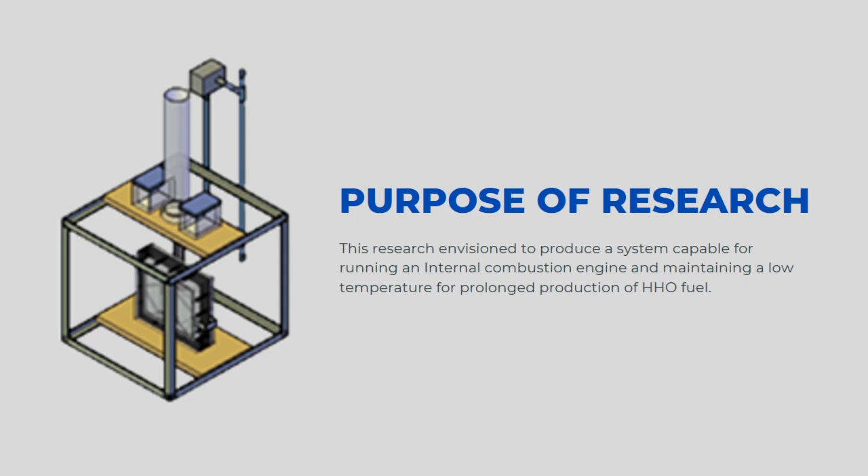On this project, we will be making use of cooling tubes and an acrylic glass frame, which will be further discussed on the following slides. There are three main objectives for this project.

First is to stabilize the temperature and to show the significant effect and difference upon the application of acrylic glass frame and cooling tube to the generator. Second is to stabilize the production of the HHO fuel, and lastly, to become automobile efficient.

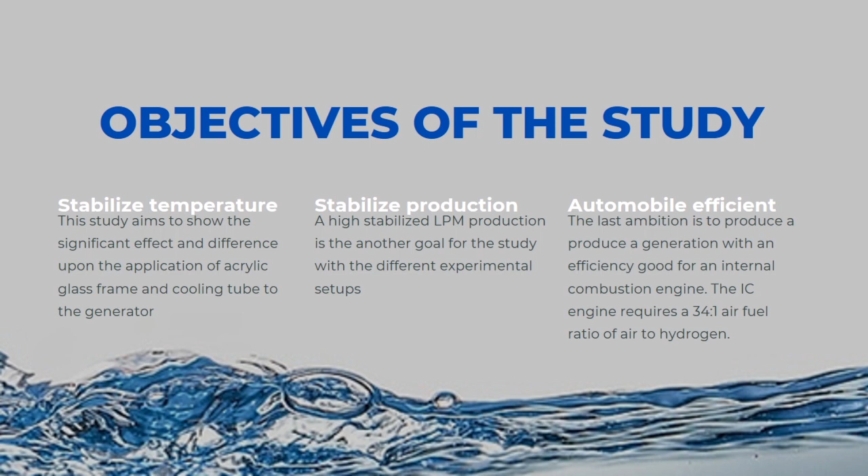This project has two targets. Number one is the automotive industry. Emergence and development of alternative fuel vehicles as well as systemized vehicle catalytic conversions have been regulated for future improvements.

Alternative fuels for automobile applications include natural gas, propane, hydrogen fuel cells, and even electricity. However, although promising results can be seen in the use of these alternative fuels, innovations are required before being commercially feasible in the automobile industry.

Second is the fuel and energy industry. The increase of world dependency on fossil fuels comes with the soar of global release of harmful gases such as carbon dioxide. With the innovation of having hydrogen gas as fuel, toxic emissions are lessened.

The challenge of this is finding a reliable, cheap, and stable source of hydrogen gas, which is the target of the researchers in this study.

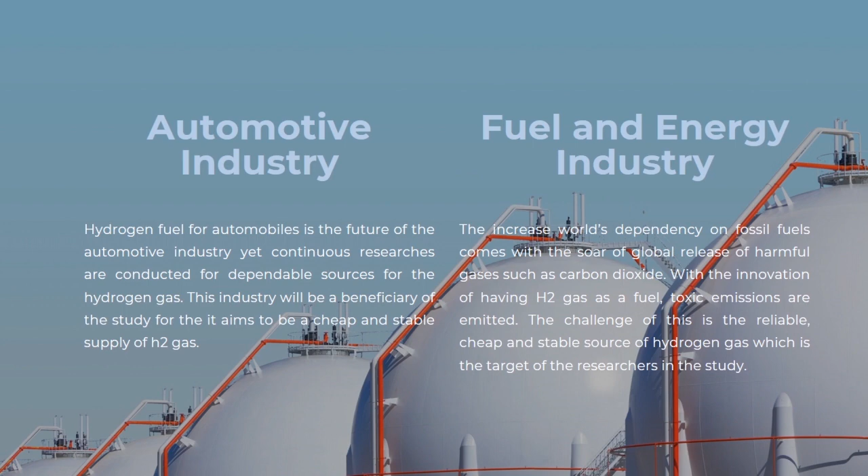Technological advancement further increases probable ways of promulgating the improvement of fuel efficiency and gas emissions in internal combustion engines. Hydrogen generator designs should take into consideration its efficiency, operability, and safety.

Since rapid combustion happens in a hydrogen generator, a system should be made to withstand the high temperature given by the source that will provide the amount of energy to generate HHO fuel.

Hydrogen and fuel cells are a viable response due to their potential to be an energy system with low carbon emissions. The significant technology improvements make manufacturing of such systems cheaper than they used to be.

It opens opportunity for job creation, efficiency in general business, and a revitalized economy with high demand and price of agricultural products. The versatile and flexible uses of hydrogen and fuel cells vary from electricity generation, transport, domestic, and industrial uses. This presents a multitude of options when considering the socio-economic circumstances and factors at play.

The HHO generator setup. Modifications were made while making our own HHO generator.

Modifications such as the application of the acrylic glass frame and the relocation of holes found on the stainless steel plates. However, the arrangement of plates remains the same. Positive plates are still located in front and back of the arrangement, and the negative plate in the middle.

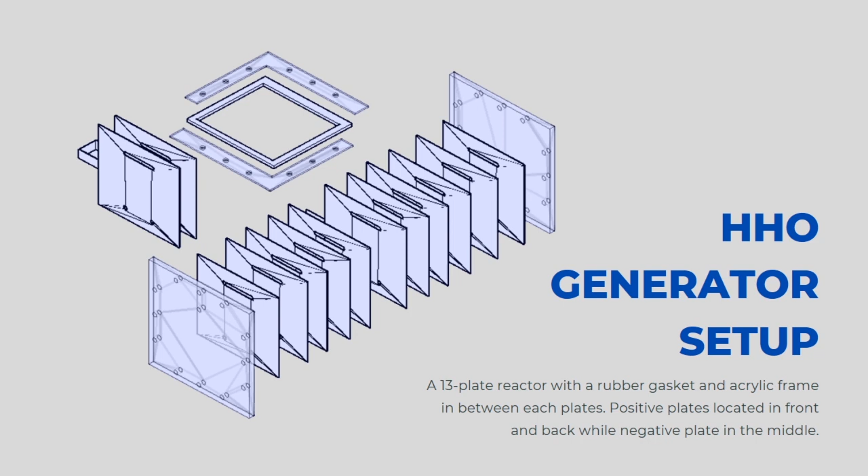Flow diagram. The figure shows how the electrolyte, cooling water, and HHO gas flow in the system. Electrolyte flows out from the reservoir.

into a stainless steel tube located inside the cooling tube. The cooling tube has a pump that regulates the water that flows against the electrolyte. The electrolyte then flows into the HHO generator.

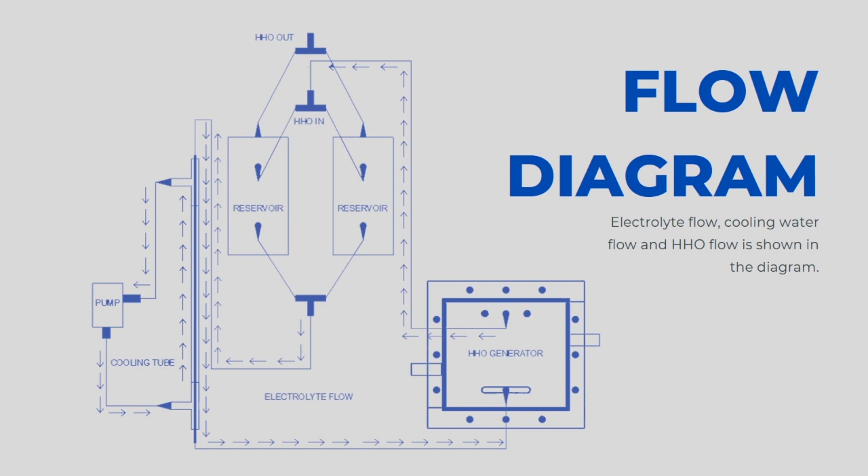Then the HHO generator produces HHO gas that is then transferred into the reservoir and later on be readied for production.

Acrylic glass frame: this serves as a thermal stabilizer for the steel plates and holds them in place. As you can see, they come in pairs, an L shape that is then shaped into a square, which is directly bolted into the acrylic glass cover.

Why acrylic glass? There are 6 essential characteristics of acrylic glass. One characteristic is its mechanical strength. Fiberglass has a specific resistance greater than steel, so it is used to make high-performance tasks.

Next is compatibility with organic matrices. Fiberglass can have varying sizes and has the ability to combine with many synthetic resins and certain mineral matrices like cement. Next is dimensional stability.

Fiberglass is not sensitive to variation in temperature and hygrometry. It has a low coefficient of linear expansion. Another characteristic is electrical characteristics. Fiberglass is a good electrical insulator even at low thickness.

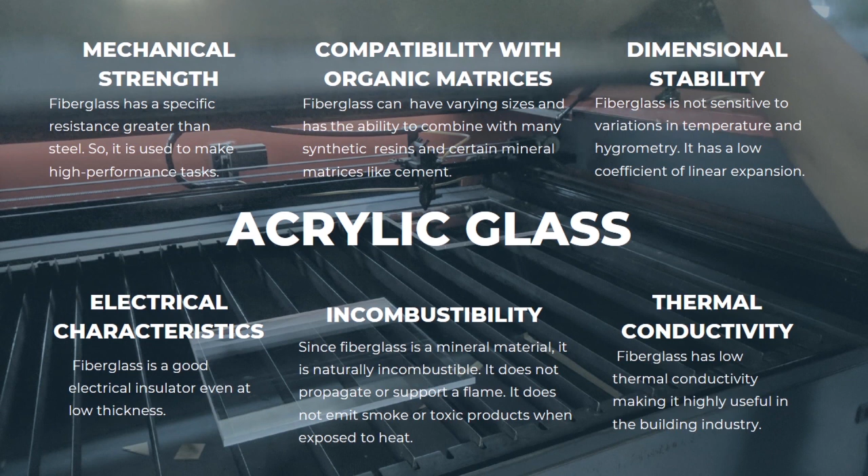Cooling tube: this is used as a heat exchanger to remove heat from the electrolyte coming into the generator. As explained earlier, it uses a water pump that negates the flow of electrolyte which is flowing in a stainless steel tube. It uses water as a coolant, and negating the pressure or flow of the electrolyte reduces the temperature of the electrolyte coming into the HHO generator.

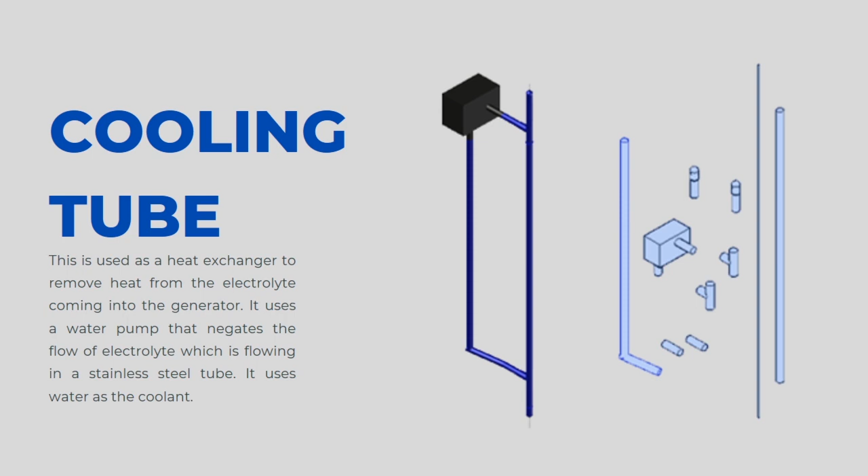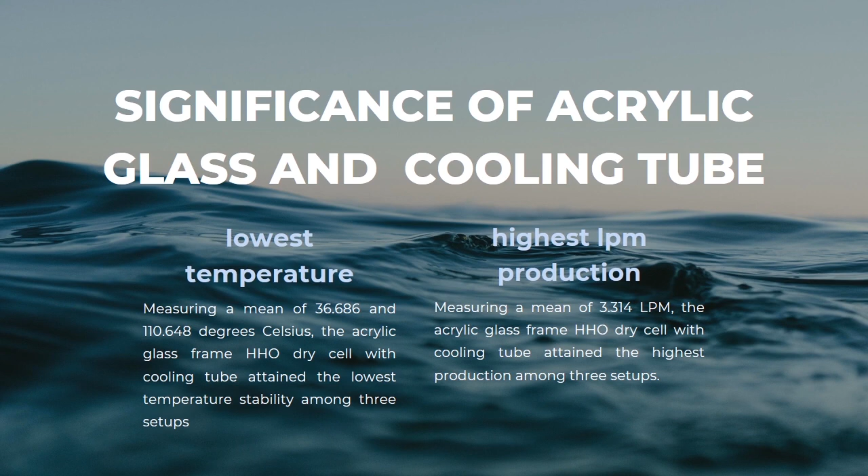What is the significance of acrylic glass and cooling tube? All throughout the experiment, it recorded the lowest temperature, measuring a mean of around 36 and 110 degrees Celsius. The acrylic glass frame HHO dry cell with the cooling tube attained the lowest temperature stability among the 3 setups. It also recorded the highest LPM production, measuring a mean of 3.3 liters per minute. The acrylic glass frame HHO dry cell with the cooling tube attained the highest production among the 3 setups.

We conducted 3 experimental setups all throughout our experiment: 1. With cooling tube and with acrylic glass frame. 2. Without cooling tube and with acrylic glass frame. And 3. Without cooling tube and without acrylic glass frame.

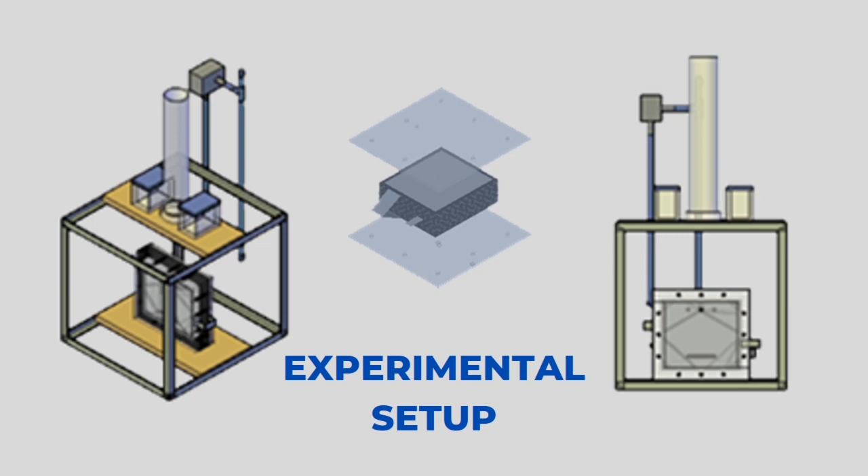Temperature: the graph above shows how the presence of the acrylic glass frame and cooling tube affect the negative and positive terminal temperatures. In the negative side temperature difference graph at the left, the acrylic glass frame HHO dry cell with cooling tube recorded the lowest temperature among the 3 experimental setups. As well as in the positive side temperature difference graph, the acrylic glass frame HHO dry cell with cooling tube again recorded the lowest temperature among the 3 experimental setups.

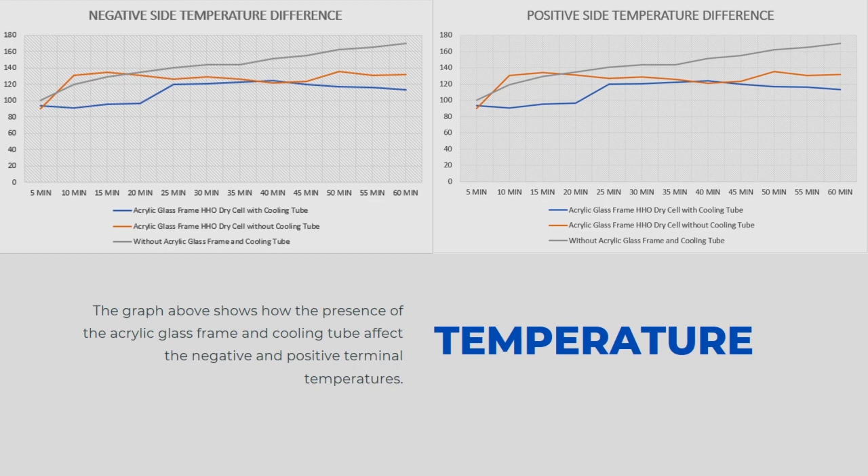Volumetric flow movement production: the graph shows the distribution of liters per minute production of HHO fuel due to the absence and presence of acrylic glass frame and cooling tubes. As you can see in the graph above, the acrylic glass frame HHO dry cell with cooling tube recorded the highest LPM production of the HHO fuel. The significance of the liters per minute production is it shows how efficient your HHO generator system is.

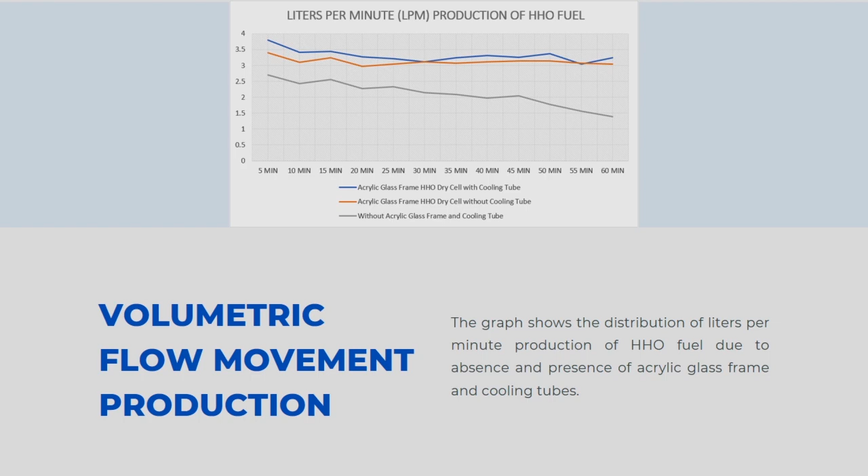The results can be seen from the graphs which contain the data produced by conducting experiments. It has shown a significant difference among the three setups. The setup with acrylic glass frame and cooling tube recorded the lowest temperature and highest LPM production. The study has also shown a significant relationship between the LPM production and temperature changes in different terminals. The higher the temperature in the terminals, the lower the LPM production is. So it is important to stabilize the temperature in these terminals to maintain the best LPM production possible.

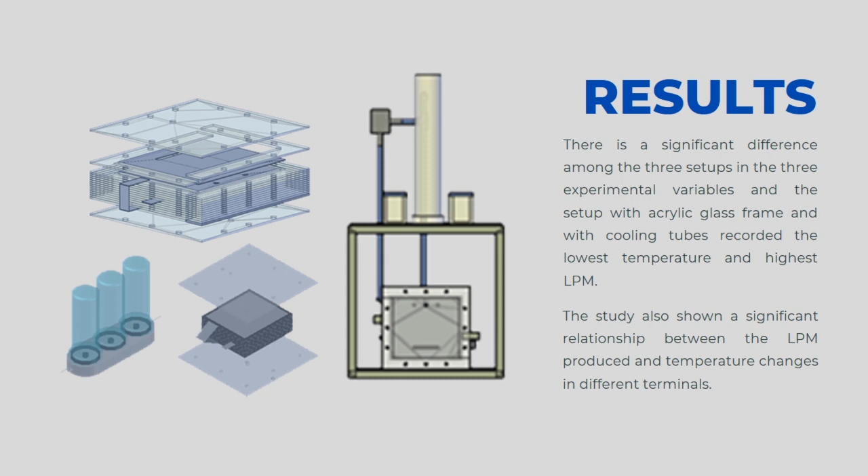Innovation of the system: based on the results, the acrylic glass frame and cooling tube has significance with the performance of the system, with its capacity to let the system have a stable temperature and a high volumetric flow movement production.

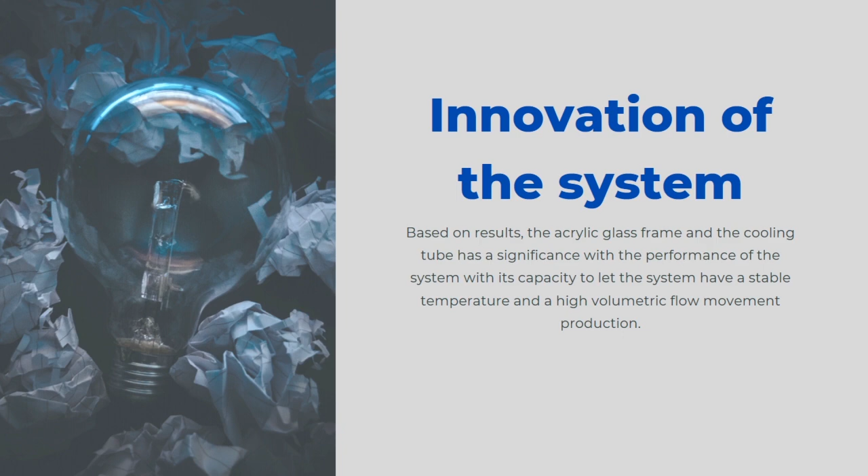The researchers also suggest that the H2 and O2 gases produced by the generator should be separated. Positive plates produce O2 gas, while the negative plates produce H2 gas. With this, further research should focus on the separation of these gases, particularly hydrogen gas as a fuel additive for automobiles.

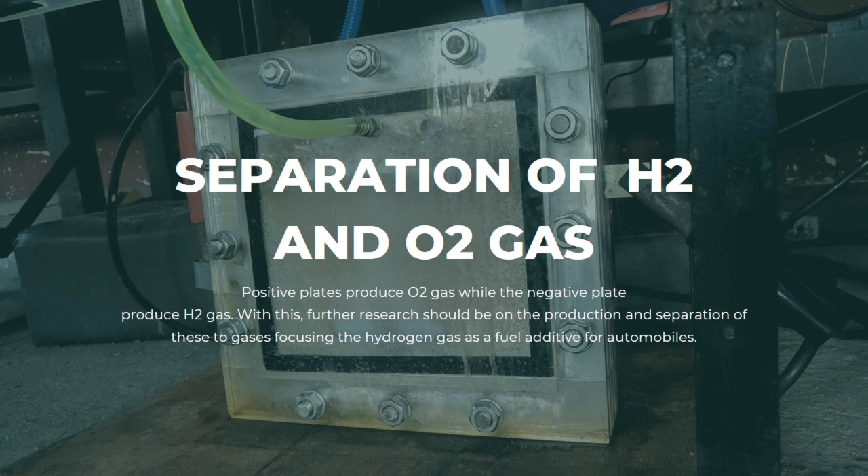The graph has shown the significant relationship between the temperature of the terminals and the LPM production, so it is important to maintain a good cooling system. Cooling tube reservoir: the researchers found out that there is inconsistency in the temperature of the cooling water. They recommend inserting another water reservoir that supplies additional water coolant to the cooling system.

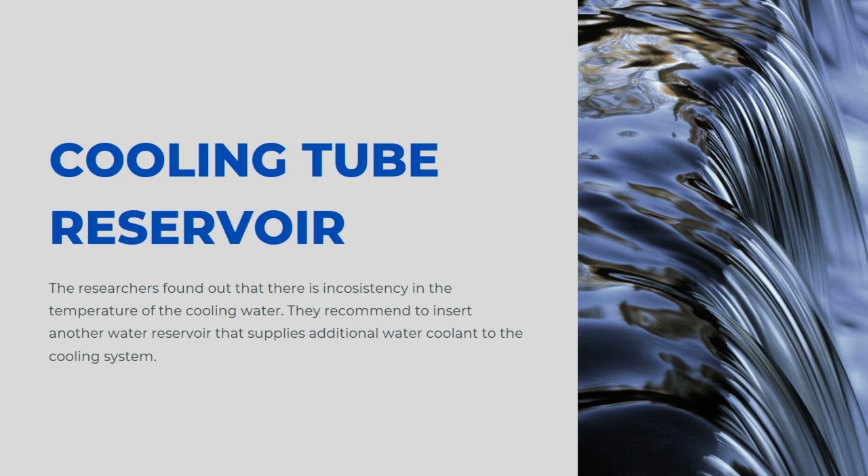We must move away from our dependency on fossil fuels, and I am glad that the global market has invested over $1 billion in hydrogen fuel cell cars to meet this goal, a quote by Albert Quinn from 2017.